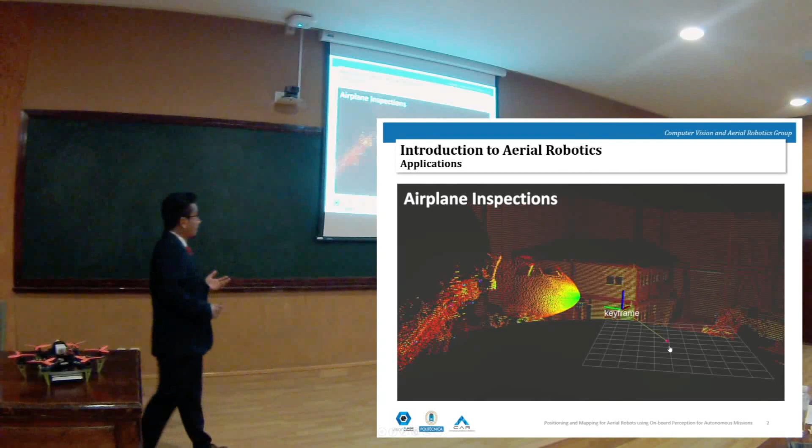So first of all, let's look into some of the cool indoor applications that these autonomous aerial robots are capable of solving today. Applications like airplane inspections; this was performed by our group, and I participated in this project. Then inspections such as thermal power plant inspections, which was also performed by our group. I participated in it as well.

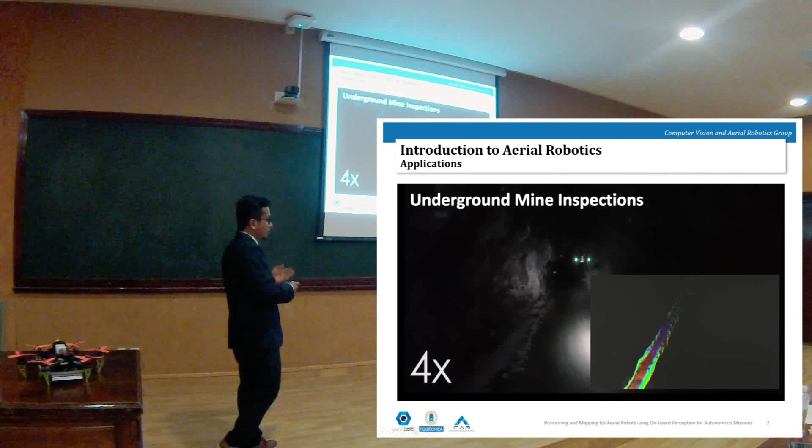Then inspections like chimney inspections, then underground mine inspections. This was performed by the University of Nevada. Penstock inspection, tunnel-shaped penstocks, which was inspected by UPenn, and applications like inventory management.

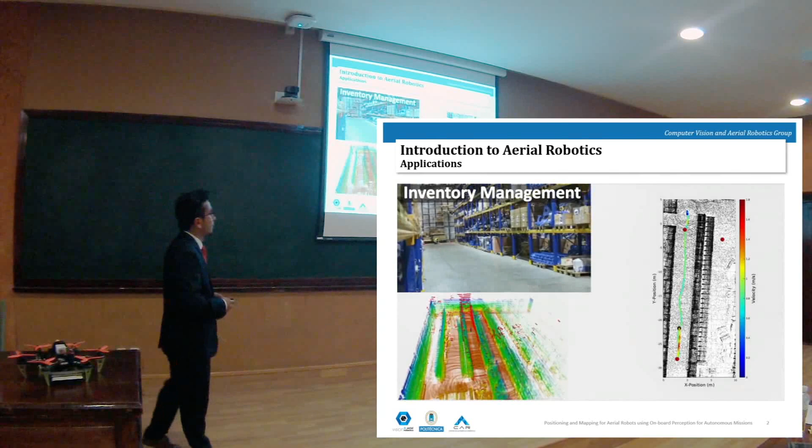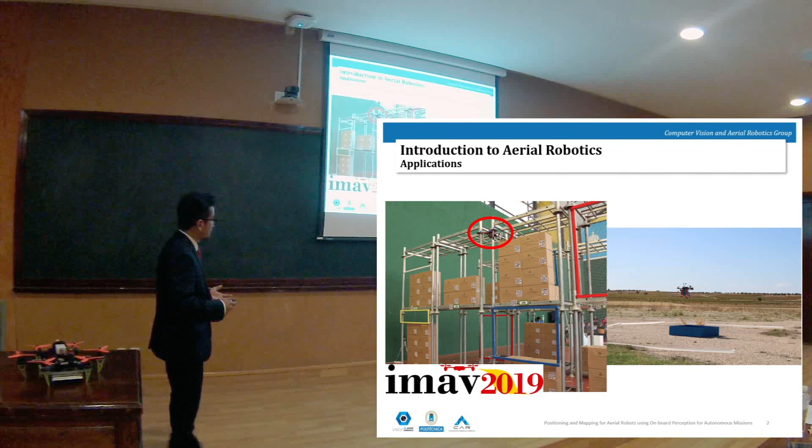So every year, the research community also provides several real-life oriented challenges for these autonomous aerial robots. One such competition is the International Micro Air Vehicles competition. This year it was held in our school, organized by our group, where the challenges were inventory management as well as package delivery. So let's look into a general structure of how an autonomous aerial robot looks.

So over here you have an aerial robot which is mounted with several sensors. These sensors provide sensor measurements which go into the localization and mapping module. This module generates the robot state and the environment. Using this data, the high-level planner, along with the mission points provided by the high-level mission planner, is able to plan the obstacle-free path for the aerial robot.

This obstacle-free path then goes into a high-level control module, which can be a position or velocity control, and which generates attitude and thrust commands for the low-level control, which is responsible for controlling the motor speeds of the aerial robot. So during this thesis, I focused mainly on the localization and mapping module, because I think this is one of the most critical modules inside an aerial robot, as failures or inaccuracies in this module can cause inaccuracies and failures in all the connected components.

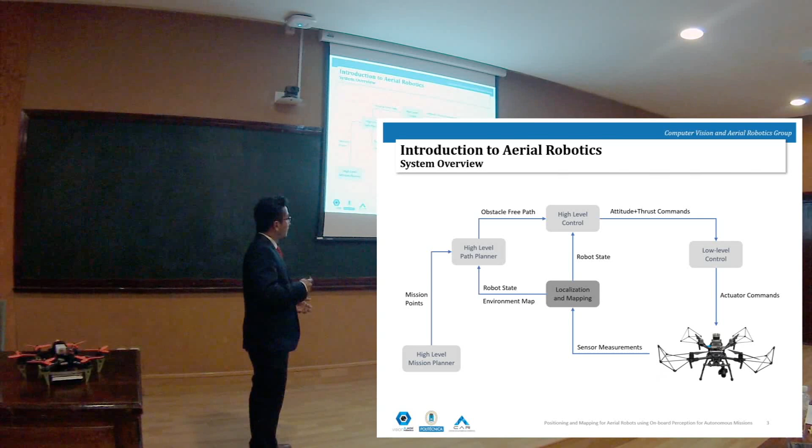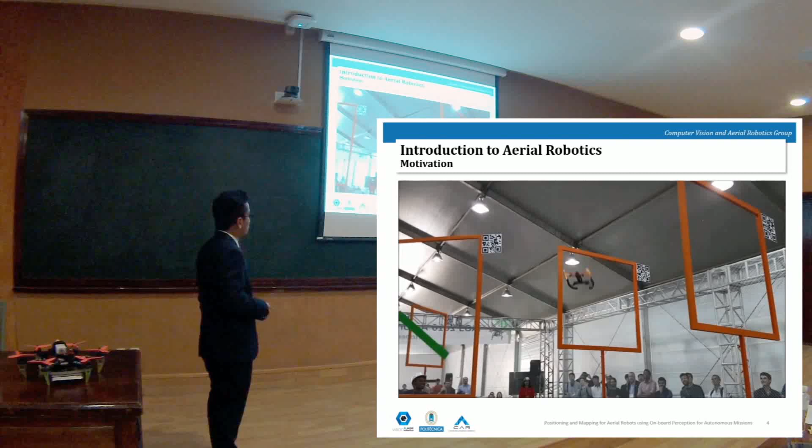So let's see how these failures can cause catastrophes like this on board aerial robots. Failures in sensor measurements or perception can cause these errors. This was again an error of perception, where it was not perceived properly. Over here as well. Over here there was an error in the sensor. Over here the perception did not work properly. Over here as well.

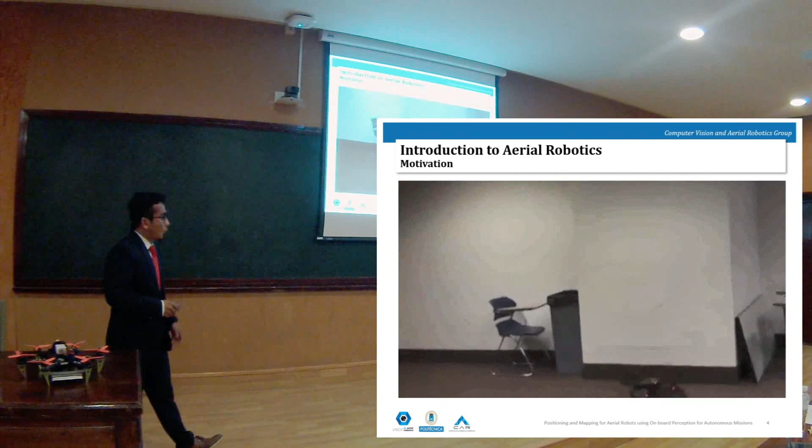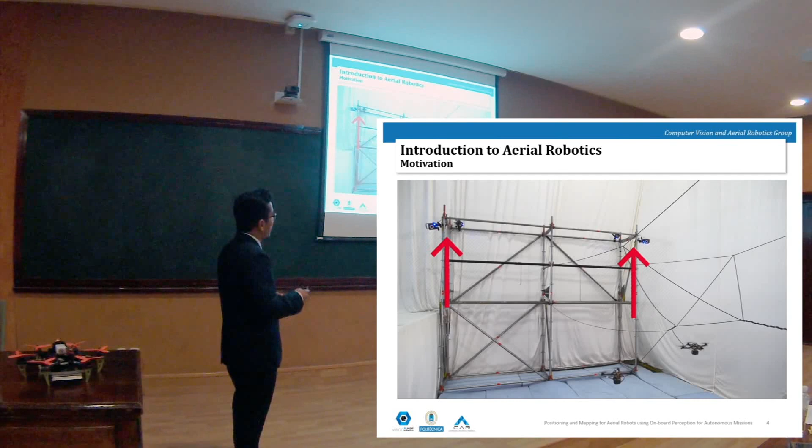Also, there is a lot of research being performed during these years, where autonomous aerial robots do very complex maneuvers like building a rope bridge, completely autonomously. But there is a trick over here. As you can see, they use motion capture systems which are mounted externally, and these aerial robots do not have any onboard perception. These cameras are responsible for providing accurate pose estimates for the aerial robot. Thus, one focus of this thesis is also using onboard perception, because it's not possible to take this system to a real-life application.

Then section 2 of pose estimation is pose estimation using semantic stereo visual odometry, where I combine the low-level features in the environment, like textures, along with high-level semantic objects such as chairs, in order to estimate the drift-free pose of the aerial robot.

Then is the part 2 of localization and mapping, where I present the pose and map estimation, where the section 1 consists of the altitude estimation and planar mapping using point cloud sensors. This enables the aerial robot to map the horizontal planar surfaces as well as estimate the true flight altitude in dynamic as well as static environments.

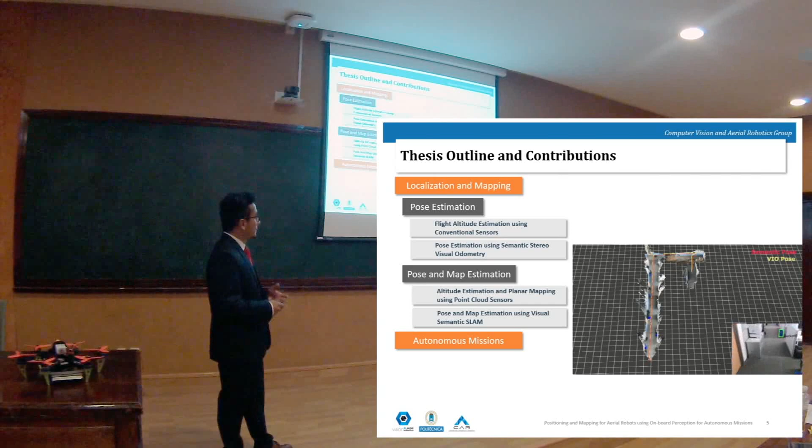And the section 2 of pose and map estimation is pose and map estimation using visual semantic SLAM, where I present a complete SLAM framework which is capable of creating a sparse semantic map of the environment, simultaneously estimating the pose of the aerial robot.

Then in the autonomous missions, I would like to present the first contribution, which is in the International Micro-Aerial Vehicles competition, where the aerial robot has to interact with several diverse components in the environment, such as the bucket, where it has to release the item inside the bucket.

The section 2 would be autonomous thermal power plant inspection, where the aerial robot autonomously inspects a real thermal power plant. And the last section is the autonomous airplane inspection, where the aerial robot inspects the airplane completely autonomously.

So let's come to the part of pose estimation, the section 1, which is the flight altitude estimation using conventional sensors. So consider a simplified environment where you have an aerial robot which needs to move from point A to point B, maintaining this altitude reference. So if it uses distance sensors, when it moves over the objects, as it measures with respect to the objects below it, the aerial robot will go up and then come down to this point B, causing an irregular flight.

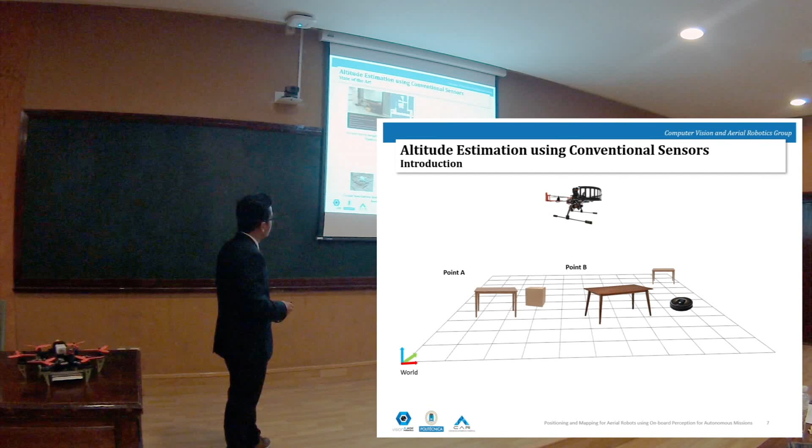Whereas in the same case, if it uses accelerometers or barometers for estimating the altitude, if the aerial robot has to move to the same point, instead of reaching the point accurately, it will have some errors.

So several state-of-the-art algorithms exist, such as the one over here, where the authors present a completely autonomous solution and provide the altitude estimation using a laser sensor, but they do a very heuristic approach in order to estimate the flight altitude and do not do the flights in presence of ground obstacles, which are common in an indoor environment. As well as this paper also, the authors present a circular laser and camera-based altitude estimation technique, but do not assume any ground obstacles present.

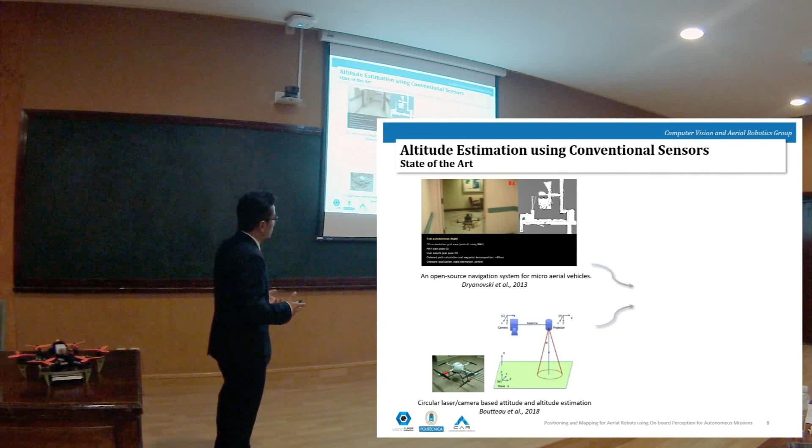So thus, we present a fast, robust, and lightweight extended Kalman filter-based flight altitude estimator, which we make open source for the research community. So it has the following features. Firstly, it's modular in design, so the user can integrate several altitude measuring sensors depending on the requirements. So it can be 3 distance sensors or 1 distance sensor, 1 barometer and accelerometer, depending on the requirement.

Then it has the capability of auto calibration of the sensors, so it can estimate the bias in the measurements of the sensors. It has the capability of a synchronous prediction stage, where the estimation is executed whenever it is required by the control algorithm, and an asynchronous update stage where the state is updated whenever the measurements arrive.

So this is how the general structure of the filter looks, where the first stage is the aerial robot, consisting of its altitude, which is along the z-axis, the velocity and the acceleration also about the z-axis, then the angles, the roll and pitch angles, as well as the angular velocities about the x and y axis. In this case, there is also a state of the ground obstacle, which enables the aerial robot to estimate its true flight altitude whenever it's flying over an object, as it estimates the altitude of the ground object below.

Then it has an IMU sensor, where it incorporates the biases which can be present in the linear accelerations of the sensors, and the measurements it incorporates are the linear accelerations about the z-axis, the roll and pitch angles, as well as the angular velocities about the x and y axis. In case of the barometer sensor, it incorporates the bias, and the measurements are the pressure measurements. And the distance sensor only incorporates the measurements from the distance sensor with respect to the object below or the floor below.

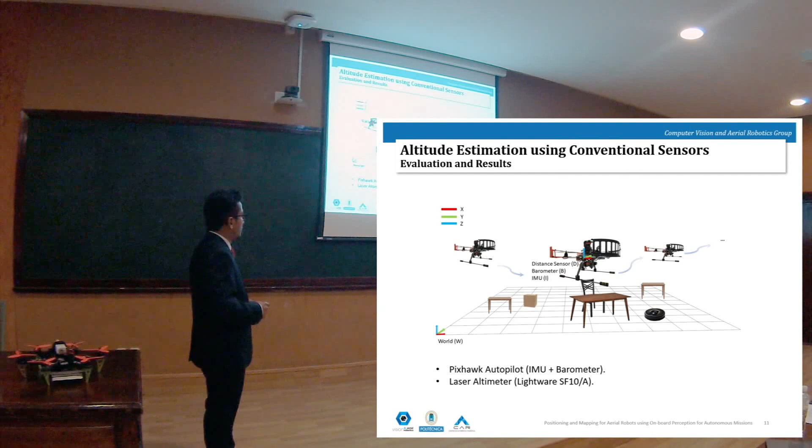So we test our approach using our custom aerial robotic platform, which has a Pixhawk autopilot. The autopilot already has incorporated the IMU sensor and the barometer, and we mount an additional laser altimeter, the Lightware SF10A, used as the distance sensor in this case.

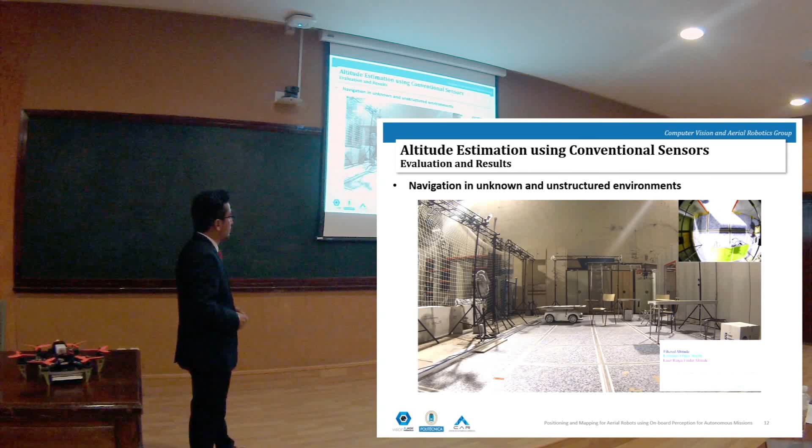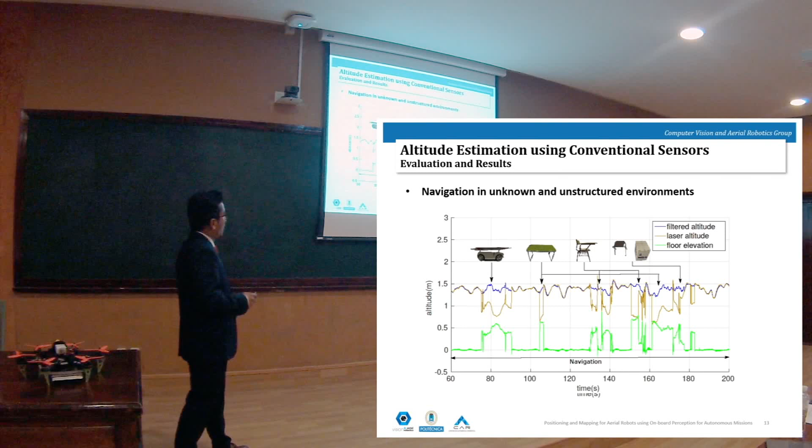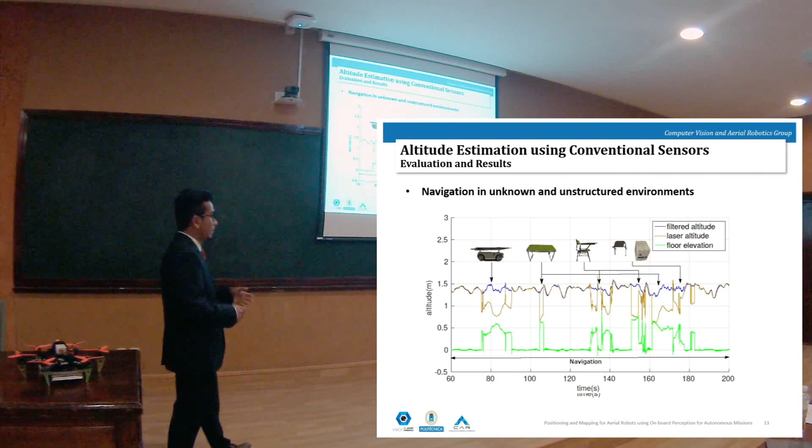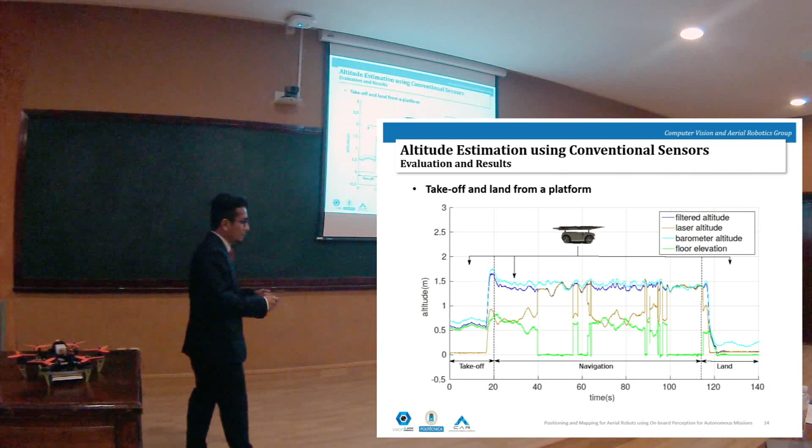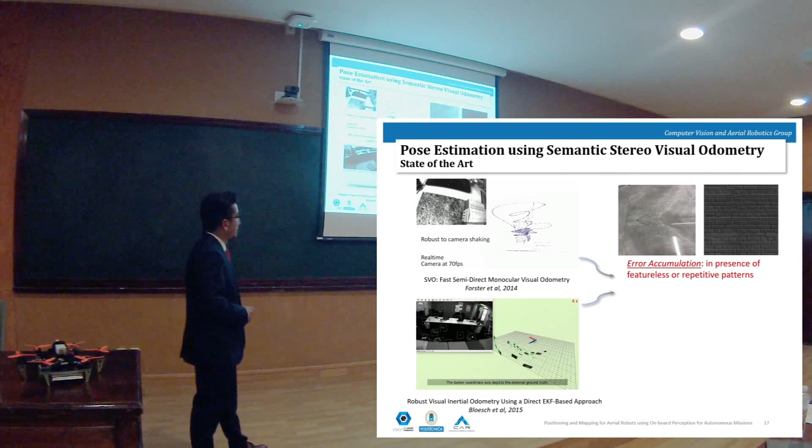Several state-of-the-art algorithms exist. One of them is the SVO, the semi-direct visual odometry, and the other is ROVIO, which is the robust visual inertial odometry. Both approaches, as well as other visual odometry techniques, have the problems of error accumulation. So if the surface is shiny or the patterns are repetitive, they can accumulate errors in the pose estimates. Also, they have problems of complete divergence. So in this case, you can observe the yellow is the pose estimate by the VO, the visual odometry, and at this point, it will diverge away from the true pose estimate due to the low features present in the environment.

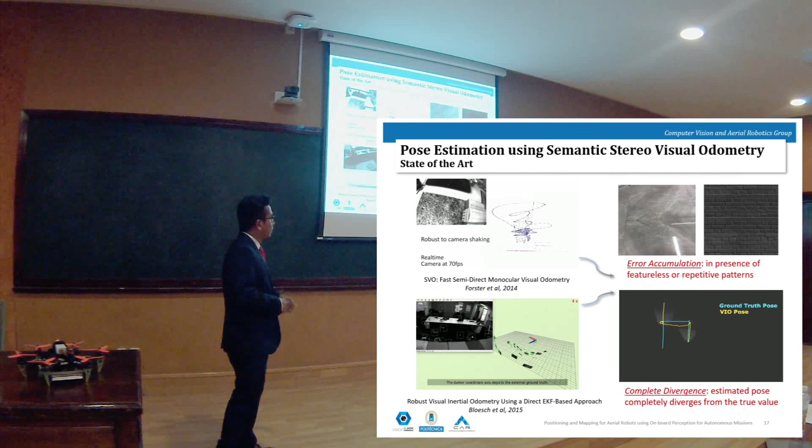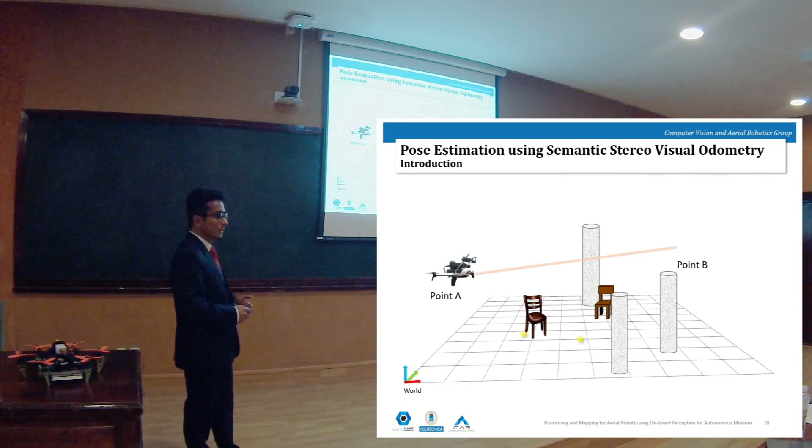So the basic idea behind the semantic stereo visual odometry is that in the same case where the aerial robot has to move from point A to point B, maintaining this line of reference, where it perceives the low-level feature, it will also perceive additionally a high-level semantic object, which is the chair in this case. So as it moves in the environment, if it loses the perception of the low-level features, or if it has errors in perceiving them, it still has the perception of the high-level semantic object, which can enable it to reach point B more accurately.

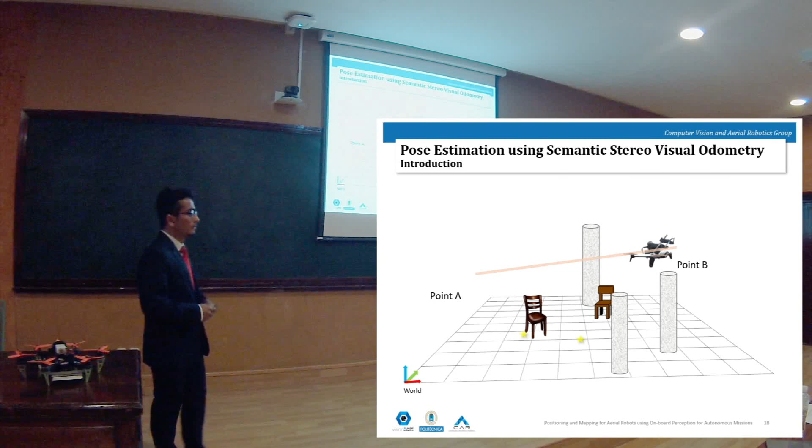But even semantic objects like chairs, which belong to the same class, have different shapes and sizes. So how do we use them exactly in order to improve the error in the pose estimates of the visual odometry? As you can observe, all these objects have one common planar surface, which is the horizontal planar surface. So we extract the horizontal planar surface from these semantic objects in order to improve the drift from the visual odometry.

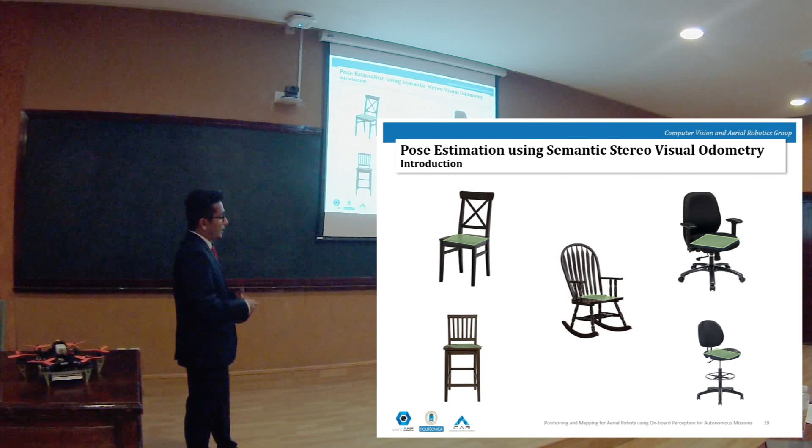We thus present a real-time and robust particle filter-based approach, which we make open source as well for the research community. It is modular in integrating the visual odometry algorithms. If the user requires a different visual odometry, it can be easily integrated in a plug-and-play manner. Then it loosely couples this visual odometry information with the IMU sensor data, as well as the semantic horizontal planar information, which I explained in the previous slide. Thus, it's capable of estimating the complete 3D pose of the aerial robot.

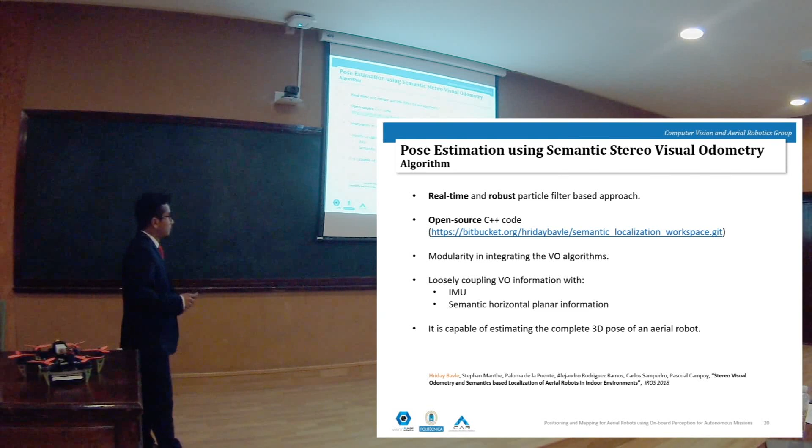It consists of mainly two stages. The first stage is the prediction stage, where we have our stereo visual odometry based on FAST keypoint extraction, which estimates the pose of the aerial robot as it moves. This is accurate for short time intervals, but over a long time, due to low features in the environment or other errors, it can accumulate errors in its pose estimate.

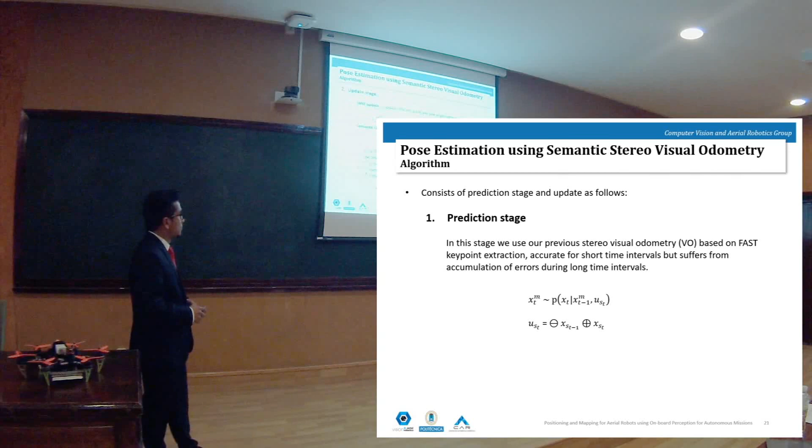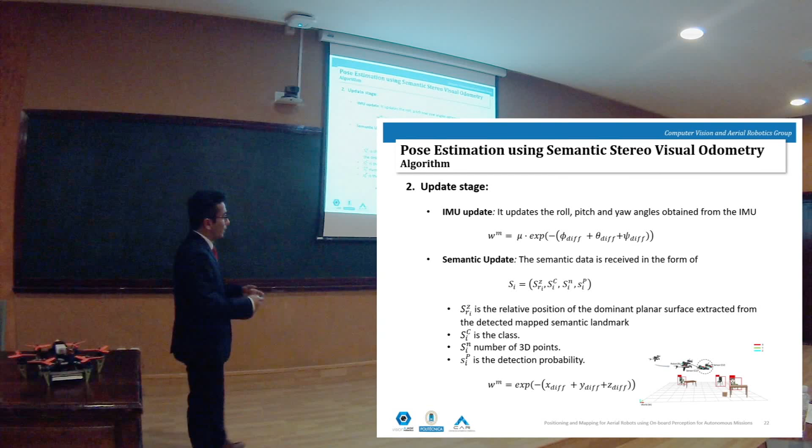Sn are the number of 3D points that can be present in that planar surface, and SP is the probability of the detection. So using this semantic data, we can map these data with an already pre-created map of the objects in order to improve the drift or error in the visual odometry pose.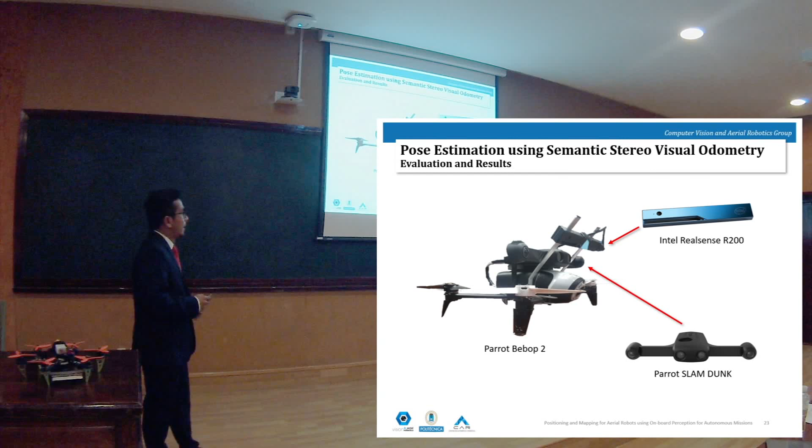So we test our approach using the aerial robotic platform, which is the Parrot Bebop 2, and we mount it with the Parrot SLAM Dunk, which is a stereo vision sensor for performing the stereo visual odometry, and the Intel RealSense R200 camera performing the planar extraction.

So in this experiment, which we call the ground truth evaluation, the aerial robot is moved in an environment which has low texture, or I would say less texture, but also has a combination of high-level semantic objects. So in this case, when the aerial robot is flown in a trajectory performing several repetitive loops, we have an average trajectory error of 18 centimeters, whereas the visual odometry has an error of 85 centimeters.

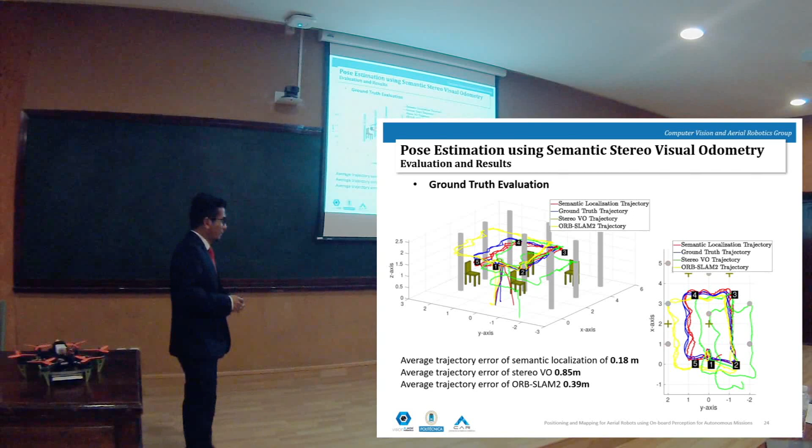When comparing the average trajectory error to ORB-SLAM2, which uses low-level features for the mapping stage as well as the pose estimation, it has an error of 40 centimeters. So this is the video of the same experiment which I mentioned.

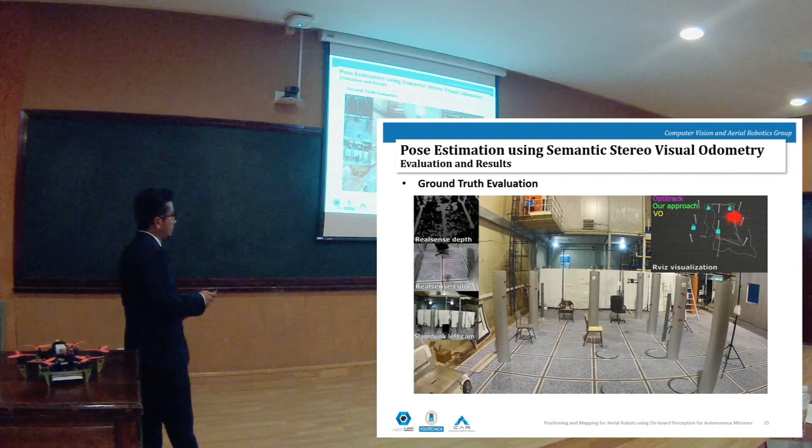Over here you can observe that as the aerial robot goes near this wall, the visual odometry starts accumulating error in its pose estimate, whereas our approach, which is combining both the data, is able to maintain the drift-free pose, and thus the aerial robot, which is closing its position control loop using the estimates from our algorithm, can navigate perfectly in the environment and can come back and land at the takeoff point.

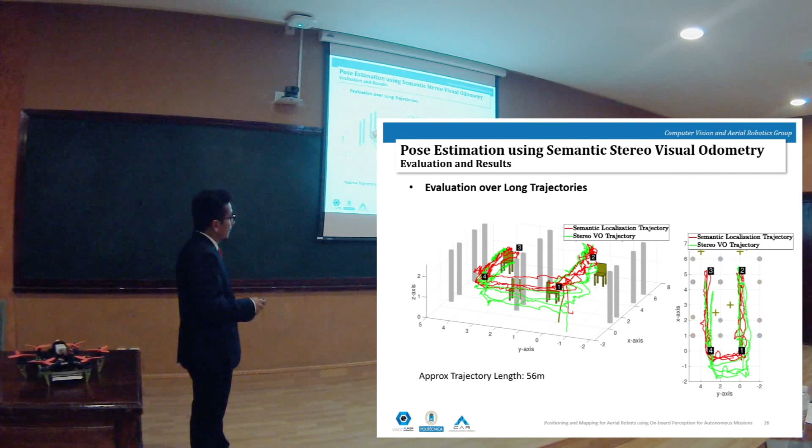Then we also evaluated its performance over longer trajectories of around 56 meters, and you can observe in this experiment that the aerial robot, which uses our estimate, takes off and lands at the same point, whereas the visual odometry has an error of around 2 meters in its estimate.

So with this we come to the end of the part of pose estimation, and let's start the part of pose and map estimation. I'll start with the first section, which is the altitude estimation and planar mapping using point cloud sensors. In the previous approach, which used distance sensors for estimating the flight altitude of the aerial robot, these distance sensors, like laser altimeters, perceive very little information about the environment at a given time instant.

So we present a fast and robust Kalman filter-based SLAM approach using RGB-D sensors. We also make it open source for the research community. It has the step of fast planar clustering, segmentation and mapping using low resolution RGB-D images. Thus it's able to estimate the flight altitude while simultaneously mapping the planar surfaces at high frequencies of 50 to 54 Hz. We test the approach in both static as well as dynamic environments.

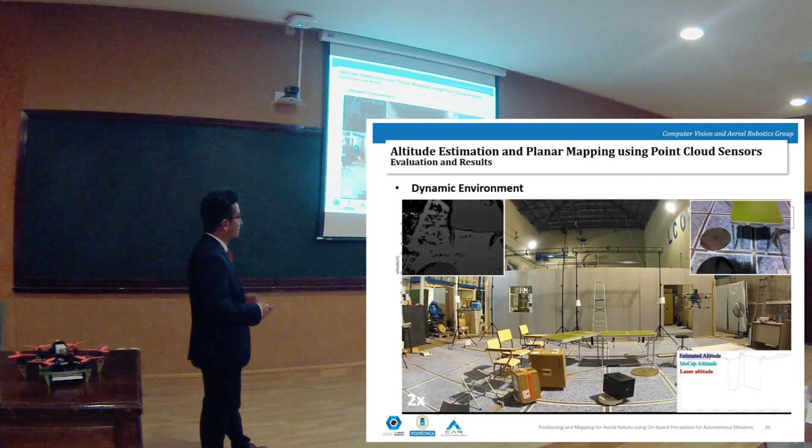We then test the approach in the same experiment, where instead it is the same environment, but it has a combination of both static as well as dynamic objects. Even in this experiment with two different velocities, low and fast, the flight altitude estimate has a root mean square error of around 4 centimeters.

So with this, we finish section 1 and we come to section 2, which is the pose and map estimation using visual semantic SLAM.

There are several state-of-the-art techniques. One of them is ORB-SLAM 2, which is a complete SLAM framework which uses low-level features for creating a low-level map of the environment, simultaneously computing the pose of the camera. And there are techniques like SLAM++, which creates a high-level object map of the environment using chairs or tables, simultaneously computing the pose of the camera.

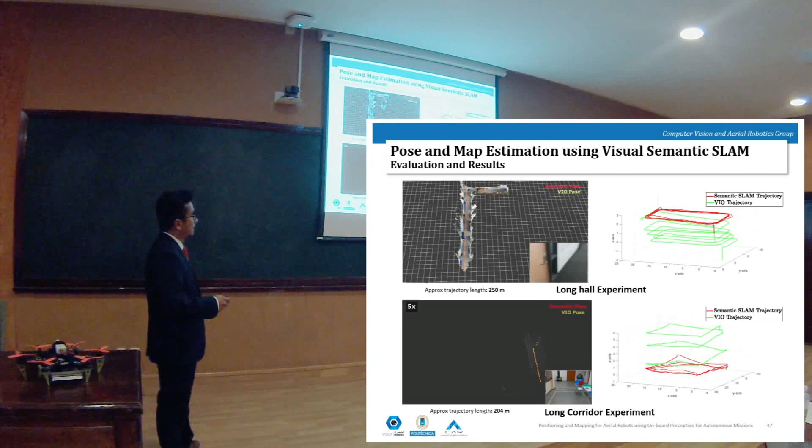Here you can observe in green the estimates from the visual inertial odometry, which drift as it moves through the environment, whereas our approach, simultaneously mapping the high-level planar surfaces of the semantic objects, is able to correct this error. This is the 3D map of the environment generated from the pose estimate of our approach.

In this long corridor experiment, performed under challenging illumination conditions, the visual inertial odometry has a huge drift in its estimate—around 6 meters of error in altitude along the z-axis. Our approach, using semantic objects, in this case chairs, is able to correct this error in the pose. In the 3D map generated from the pose estimate, the blue areas show the errors in the visual inertial odometry.

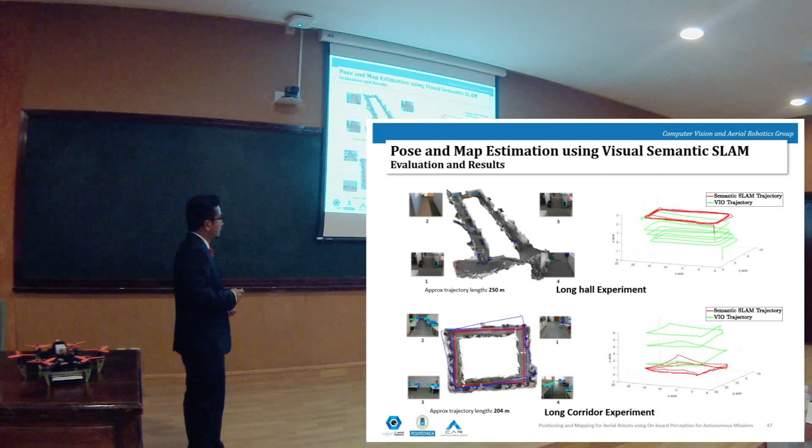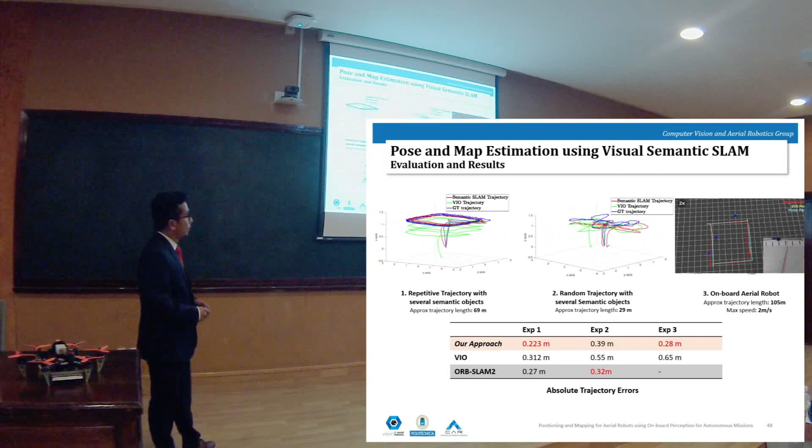We then perform flights onboard the aerial robot, moved at 2 meters per second. Our approach has an absolute trajectory error of 28 centimeters, whereas the VIO has an error of 65 centimeters. In this case, ORB-SLAM 2 fails to provide any results because of the high angular motions of the camera and the lack of texture in the environment, causing it to lose feature tracking and fail to provide a pose estimate.

So we finished the part of localization and mapping, and now I'll come to the contributions of autonomous missions.

Before starting, I'd like to give a brief introduction of the Aerostack framework, which we use in our group for the autonomous missions we perform. Aerostack is a very intelligent and modular framework in terms of the algorithms it can integrate for autonomous missions, as well as the aerial robotic platforms. During my thesis, I worked on adding several aerial robotic platforms and onboard sensors to increase the capabilities of the framework. I also worked on the localization and mapping part, where all the previously presented approaches were integrated in this module, along with other state-of-the-art localization and mapping modules depending on the application.

After knowing a bit about Aerostack, let's start with the first challenge, the International Micro Aerial Vehicles Competition, held in Beijing, China in 2016. The competition was really challenging: the aerial robot had to take off from an operating zone on a moving platform, enter a house with unknown layout through either the door, window, or chimney, pick up items which were either red or blue in color, and release them in their corresponding buckets.

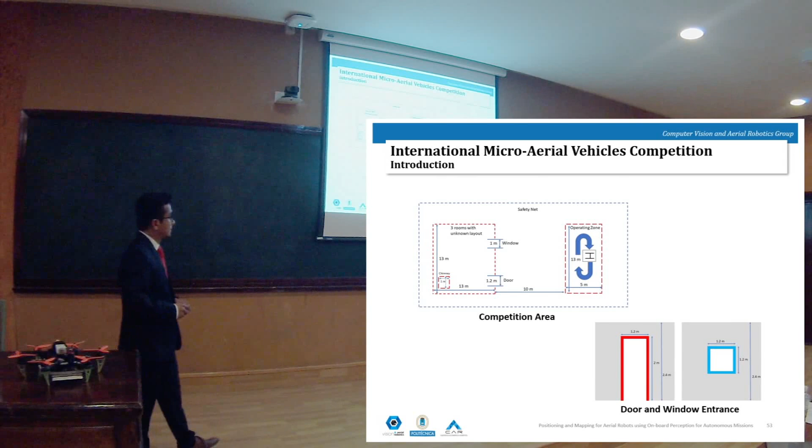For this competition, we created a custom aerial robotic platform mounted with the Pixhawk autopilot. We added several onboard sensors like the Hokuyo 2D laser sensor, Lightware SF10A laser altimeter for altitude measurements, a bottom camera, and a RealSense R200 front camera. In this mission, we did not perform the picking maneuver, only the release task. We took off with the items preloaded, using release servos where the items were hanged.

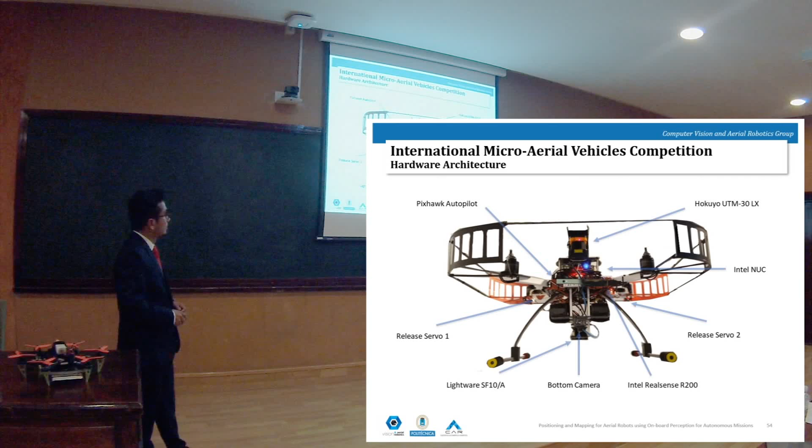We modified the Aerostack framework to be more capable of performing these intelligent missions. I worked on adding the aerial robotic platform and onboard sensors to integrate them perfectly into the framework. I also worked on the localization and mapping part with 2D SLAM, the altitude estimator presented in the pose estimation section, and the multi-sensor fusion state estimator, capable of estimating the complete 3D pose of the aerial robot.

I dedicated a lot of time to understanding and properly tuning the motion controller so the aerial robotic platform had a safe and stable flight while moving in the environment. It also had other capabilities like the visual servo controller for release maneuvers, and the motion planner to compute the obstacle-free path. Additionally, it had high-level mission planner modules responsible for planning the complete mission given the mission area.

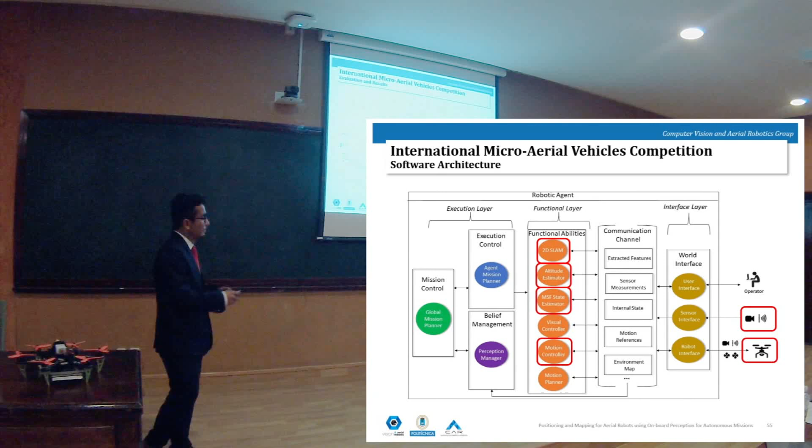We performed several simulation experiments and then a real-life replica in our lab, where we constructed a house. The aerial robot takes off from an elevated platform, goes inside, and is commanded to several random points inside the house. First it goes to one point, then through the door inside, detects the red bucket and releases the red item inside. It then detects the blue bucket, releases the blue item, comes out through the window, and lands on the moving platform.

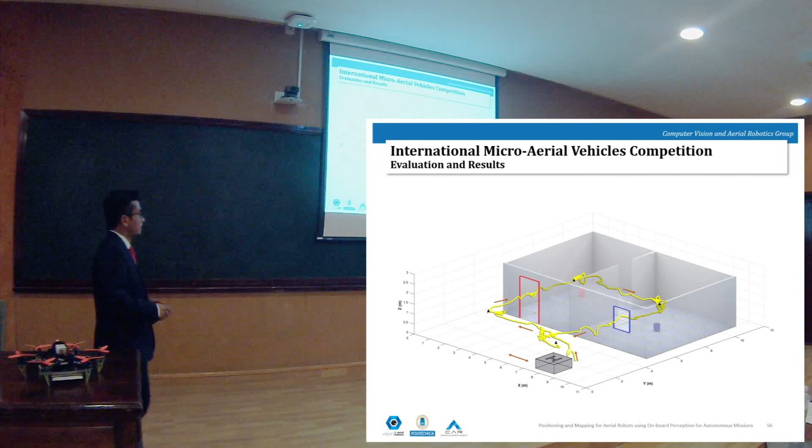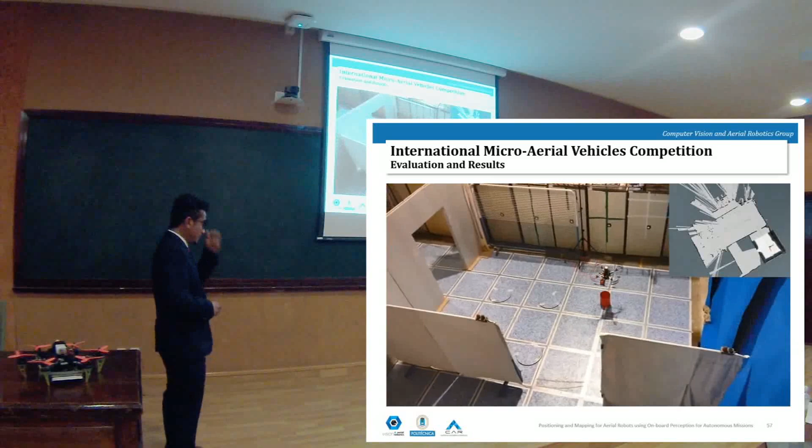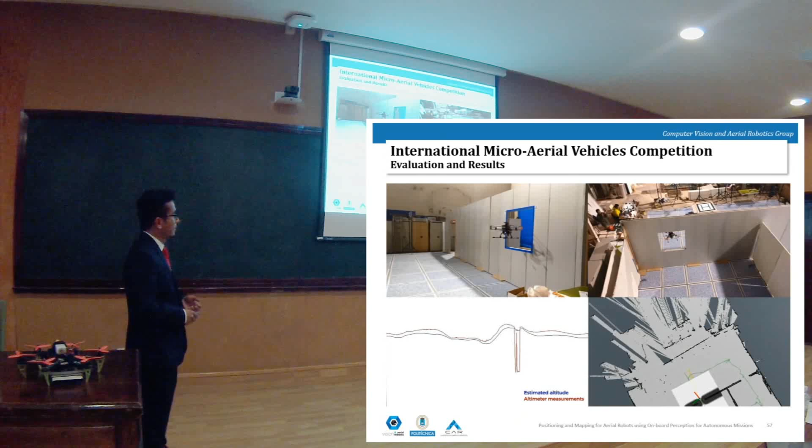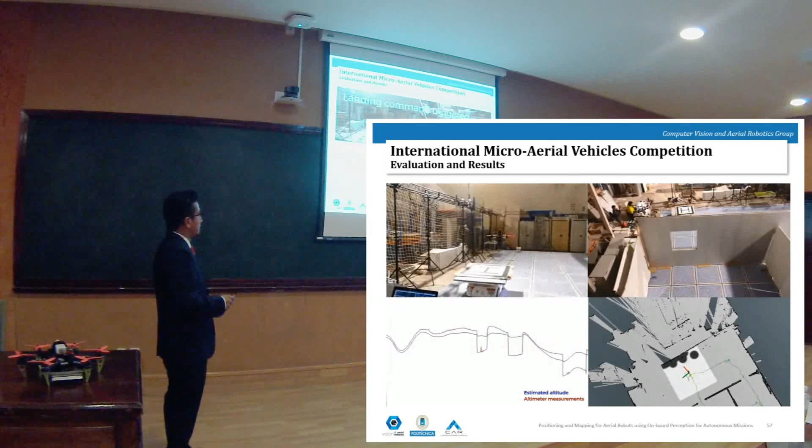Let's see a video of this same experiment. Here it's entering through the door. It has detected the red bucket, performs visual servoing, and releases the red item. Then it goes to the other point, first detects the blue bucket, goes on top, and releases the blue item inside. Then it comes out through the window—here you can observe the laser measurements being affected by the window, as well as when it's on top of the moving platform. Since our approach uses the flight altitude estimator presented previously, it's able to perform the mission completely autonomously and properly.

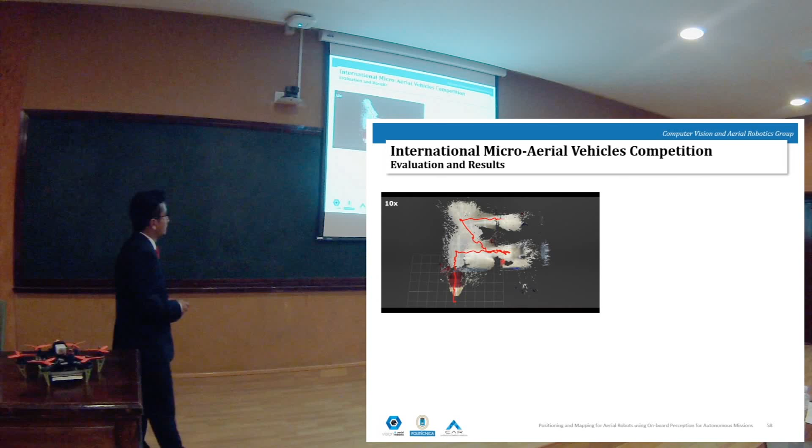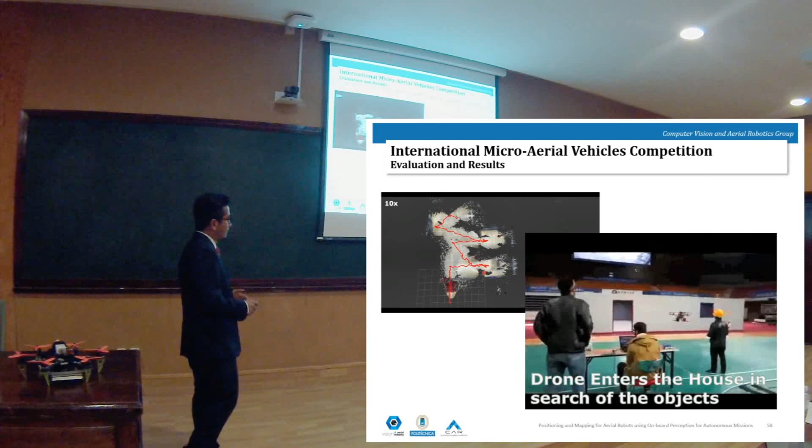During the real competition, we performed it in two trials. The first trial was the mapping part, where the aerial robot first mapped the environment and detected the buckets, learning their locations. In the second trial, it took off from the moving platform with the items preloaded, with just a click of a button, going completely autonomous—I was just there behind as a safety pilot. Now it enters through the door and goes into the room where the buckets are present.

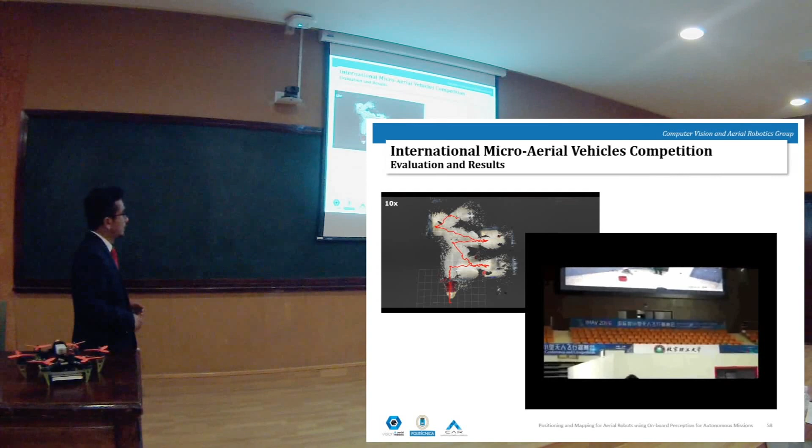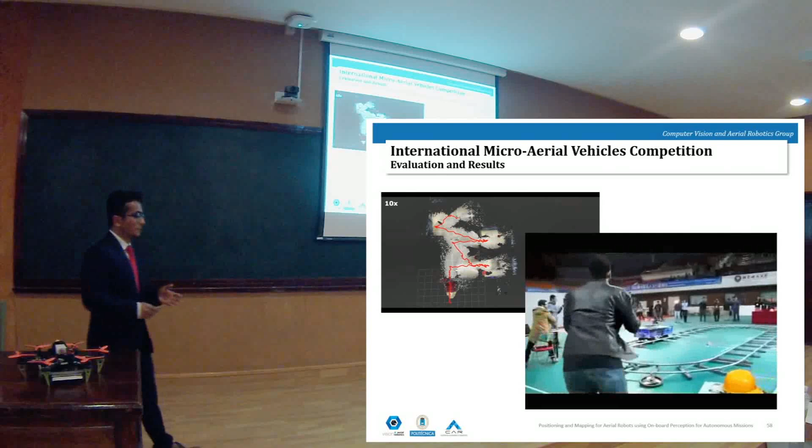Here it goes inside the house, finds the red bucket, and releases the item inside. It finds the blue one, but fails—although it detects it, it doesn't drop the item inside properly. Then it comes back completely autonomous and lands on the moving platform. That's why we were so happy, because we were the only team to perform this mission completely autonomously in the IMAV competition that year.

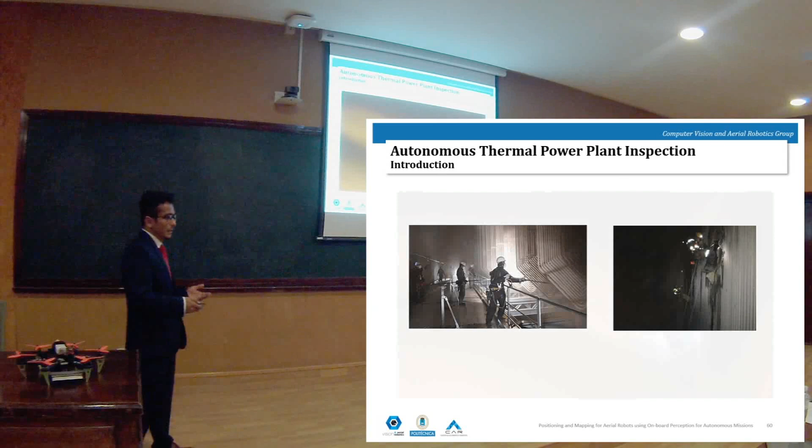So with this, we come to the part of autonomous thermal power plant inspection. For performing primary inspections of thermal power plants, the humans have to put their lives in danger in order to enter such confined spaces and also use some additional structures in order to inspect the structures or the areas of the thermal power plant. So why not perform it using an aerial robot which can do it more efficiently and faster without endangering the life of the humans either?

So we present an aerial robotic platform, which is the Matrice 100 platform, mounted with a Hokuyo 2D laser sensor, and over here is the Lightware SF/30C laser altimeter. Then it has a Zenmuse Z3 camera as well as onboard illumination for capturing the details of the thermal power plant in high resolution. And then it has the DJI Manifold onboard computer, which performs all the computation on board.

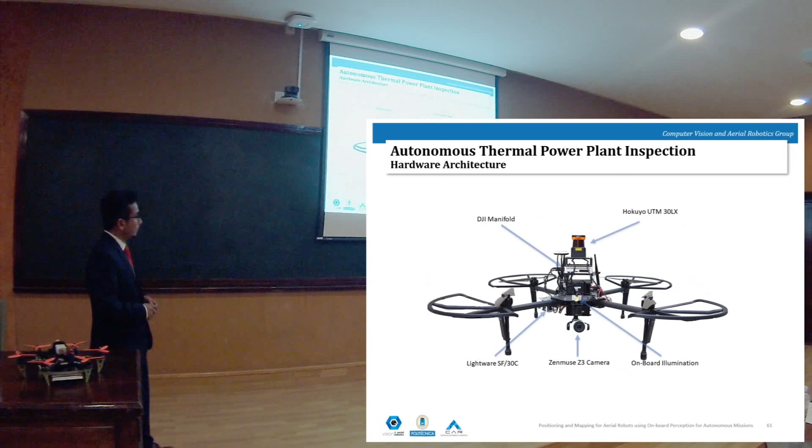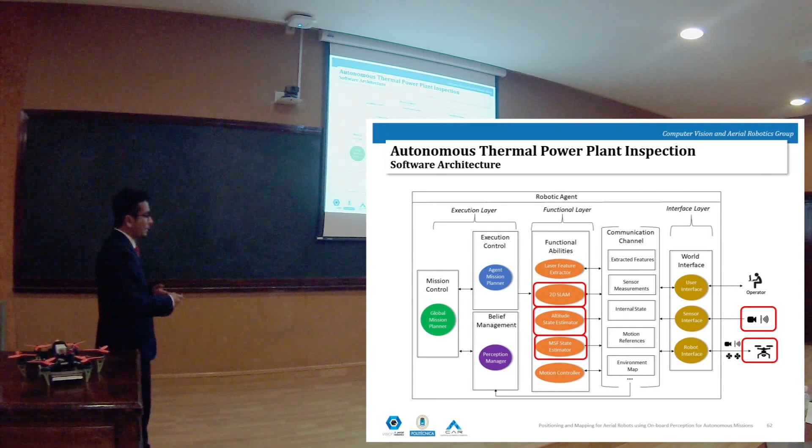In this case, the Aerostack framework structure is similar to the previous IMAV competition, but I worked on integrating the new aerial robotic platform as well as the onboard sensors. I also worked on making sure that these algorithms were working perfectly inside the thermal power plant, and also it had the same capabilities of mission planning.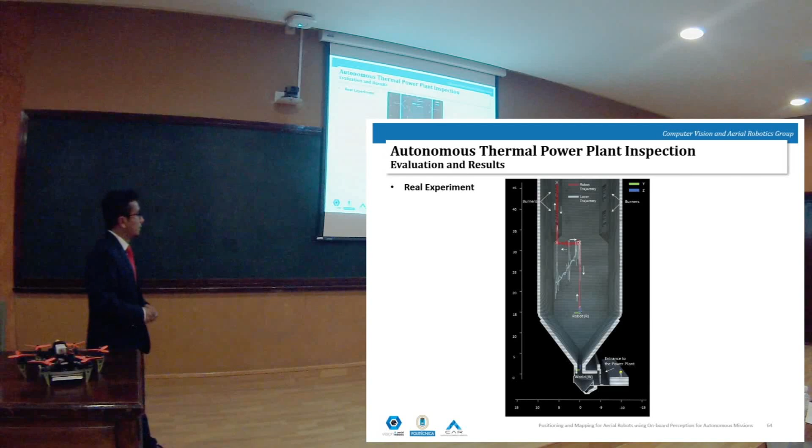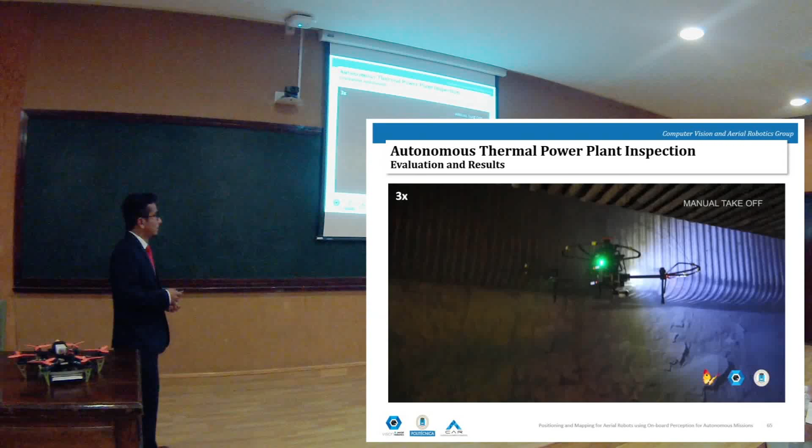So let's see a quick video of how this was performed, where you can see the aerial robot had to enter into the thermal power plant through a really small gap of around 1 meter, and then it went to the point of 14 meters, and over here it's completely autonomous, inspecting the burners of the thermal power plant at high resolution, which was validated by the inspectors over there, and they liked the quality of the data that we extracted.

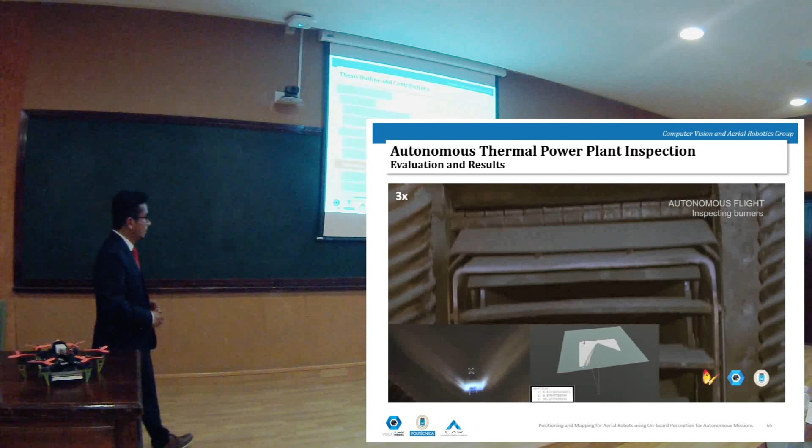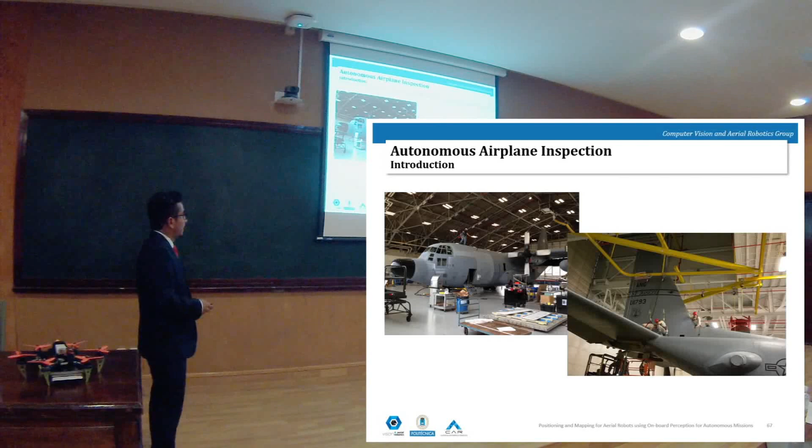So with this we come to the last section, which is the autonomous airplane inspection. The same case as the thermal power plant inspection: over here for primary visual inspection, the humans have to use additional structures like this and climb to high altitudes in order to just visually inspect the structures. So why not use an aerial robot which is capable of doing that more efficiently?

So for this approach, we use the DJI M210 aerial robotic platform, mounted with an Ouster OS1 3D laser sensor, a sonar altimeter for the altitude, and the bottom camera for measuring the velocities of the aerial robot. And it had a DJI Zenmuse X7 camera for capturing high-resolution images of the airplane structure, and the DJI Manifold onboard computer for performing the computation on board.

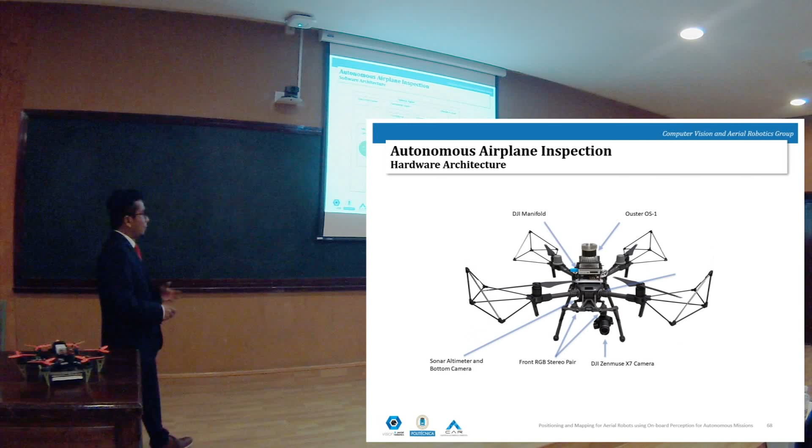Over here we modified the Aerostack framework in order to first integrate several modules for giving it the capability of autonomously inspecting the airplane.

So I worked mainly on integrating the aerial robotic platform as well as the onboard sensors, and I worked on the 3D laser odometry part as well as the multi-sensor fusion state estimator, which was estimating the 3D pose of the aerial robot. Then it had an additional capability of obstacle sensing, because the environment was full of dynamic objects, people moving around or structures moving around.

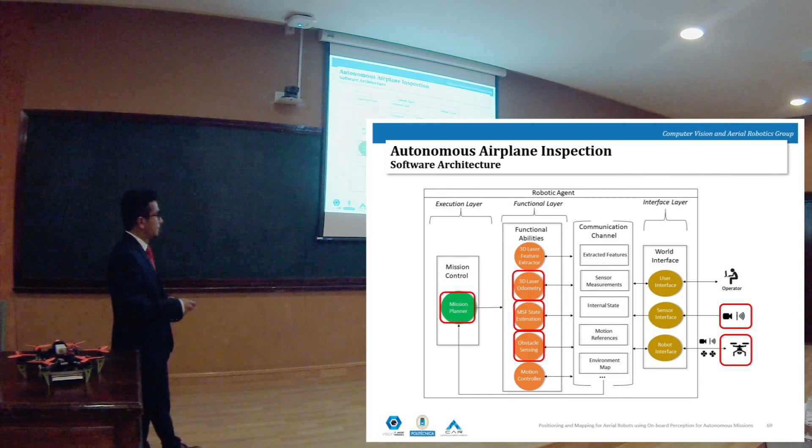So it had the capability of stopping the mission if it detected an object in its path, and resuming the mission if the object moved away. And then I worked also on the mission planning part, which read the missions given by the user in the form of text files, and it executed the points sequentially for the aerial robot to perform the inspection mission.

So this is a real inspection mission where the aerial robot is inspecting the airplane, back projecting the point clouds. Here the point clouds are just for demonstration. And here, at several altitudes, at several points, it's capturing images of the airplane. So this is one image of the airplane taken.

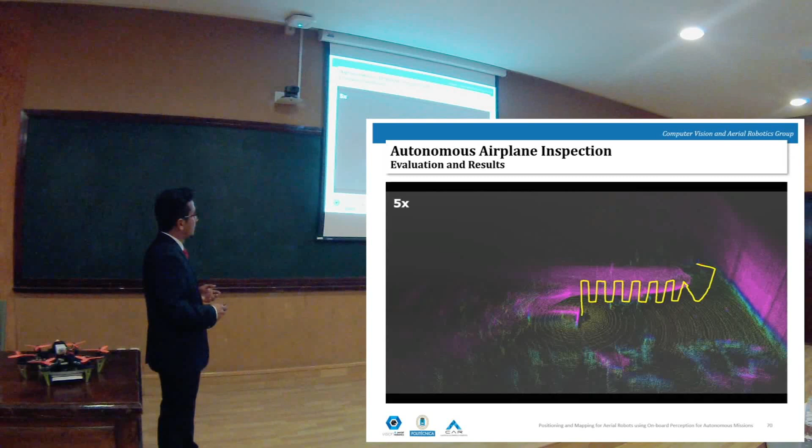And when it comes to the nose also, this is the image of the airplane structure it's taking. It's taking images and recording all the time, and this is another image. So in this mission, it performed the inspection of the complete front of the fuselage.

So with this, we come to the conclusion of my thesis, where I'd like to mention that during the entire thesis, I presented 4 state-of-the-art algorithms for increasing the capabilities of localization and mapping on board aerial robots. Firstly, I present the flight altitude estimator using conventional sensors, which enables the aerial robot to fly in unknown and cluttered environments.

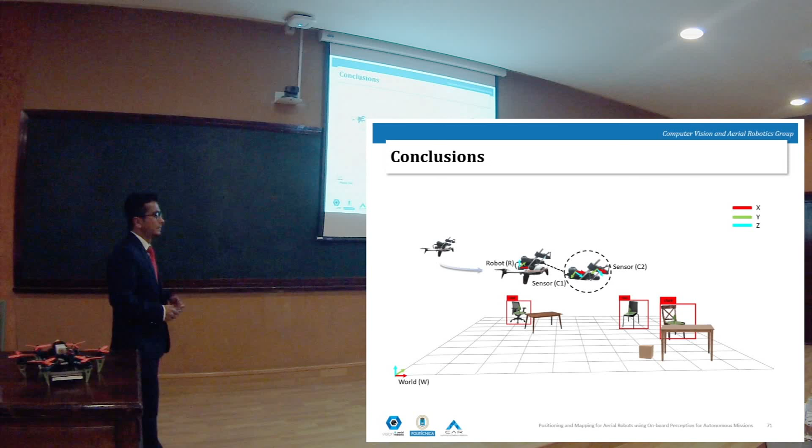Then I present the algorithm for pose estimation using semantic stereo-visual odometry, which combines not only the low-level features of the environment, but also the high-level semantic objects in order to estimate the drift-free pose of the aerial robot. Then I present altitude estimation and planar mapping, where the aerial robot not just maps the planar surfaces, but also estimates the flight altitude.

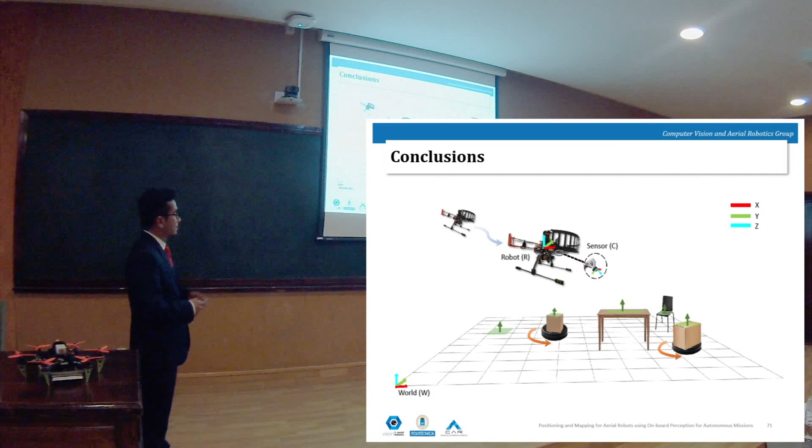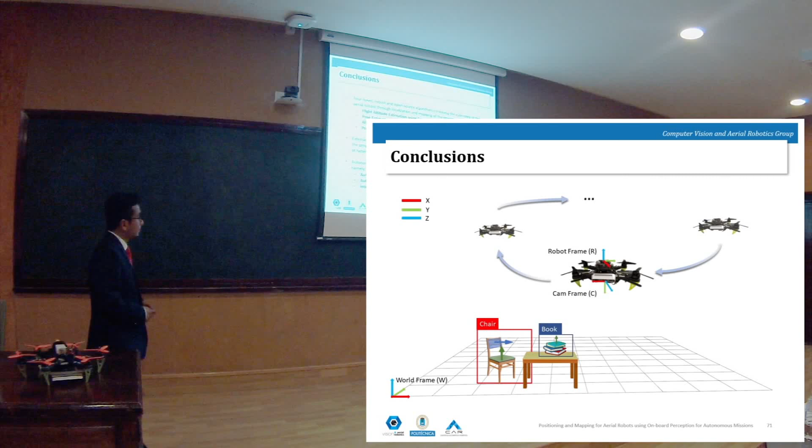And the last is pose estimation using semantic visual SLAM, where the aerial robot creates a sparse semantic map of the environment, simultaneously estimating its pose. Then I also worked on extending the Aerostack framework, integrating all the above mentioned algorithms as well as other state-of-the-art algorithms and aerial robotic platforms in order to perform several missions in challenging environments like the thermal power plant inspection, the airplane inspection, as well as international micro-aerial vehicle competitions.

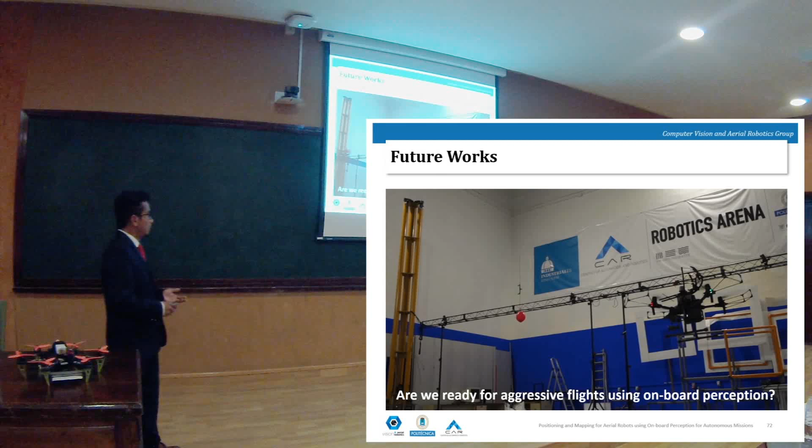So for future works, I would like to ask a question. Are we ready for aggressive flights using onboard perception? I think there is still a lot of work to go. Here you can see a very cool video where the aerial robot is capturing the ball, but there is a trick: the aerial robot knows the exact location of the ball. When we start using onboard perception, due to the aggressive flights, there can be problems.

One very basic problem is motion blur. These problems eventually cause errors in the localization and mapping part also. So as future work, I would like to work on more aggressive flights of this aerial robot so that we can achieve faster flights using these intelligent aerial robots.

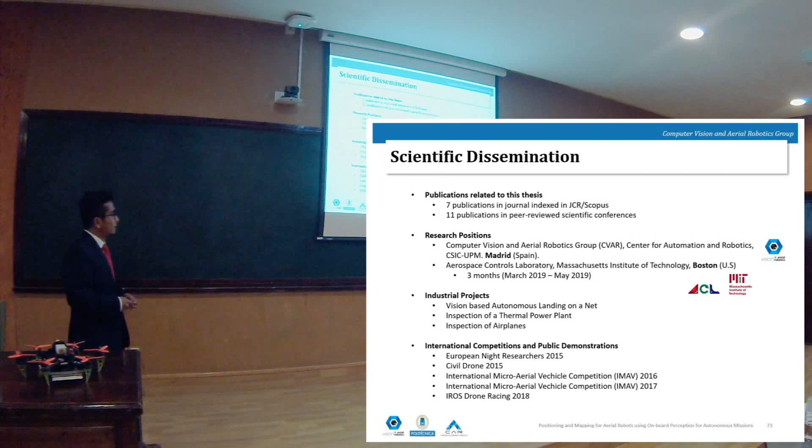During the evolution of the thesis, I've published several conference papers as well as journal papers. I've held research positions. The one I hold currently is in the computer vision and aerial robotics group, for 5 years now, and I've also been in the Aerospace Controls Lab at MIT for 3 months. And I've also worked on several industrial projects as well as international competitions and public demonstrations regarding aerial robots.

A thesis is never complete without the acknowledgements, right? First of all, I would like to thank my director, Pascual Campoy, for giving me this opportunity to come to this lab and do this amazing research. My co-director, Paloma de la Puente, for advising me during all this research. My family weren't able to come here today, but they're watching me through this video. My second family, they're sitting there.

She doesn't understand English, pero gracias por quererme y apoyarme.

And the entire department for helping me in every aspect of my thesis. And lastly, I'll not forget you guys, the entire CVAR group. I would like to give a huge round of applause for you guys.

Thank you so much. Thank you for listening. Thank you very much for the presentation. Okay, so now we are going to start.